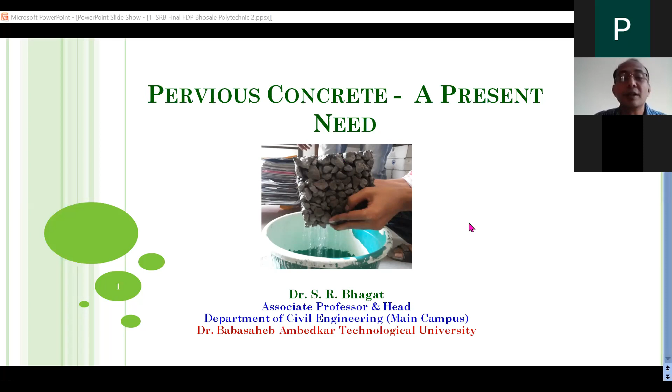I'll cover my presentation with the following points: introduction to the topic, need for pervious concrete and why there is a need, areas of application, materials required, general properties of pervious concrete, and two additional points on environmental benefits and the advantage of using such material in getting carbon points. Finally, I'll conclude the session.

You can see on the screen a photograph showing pervious versus impervious pavement or concrete. In impervious concrete, generally the pavements or areas in big societies are concreted, or pavement blocks are used, or some tile work is done. So whenever rainfall occurs, in general 30% gets evaporated from these concrete surfaces, and 50 to 55% becomes runoff. So percolation is very less.

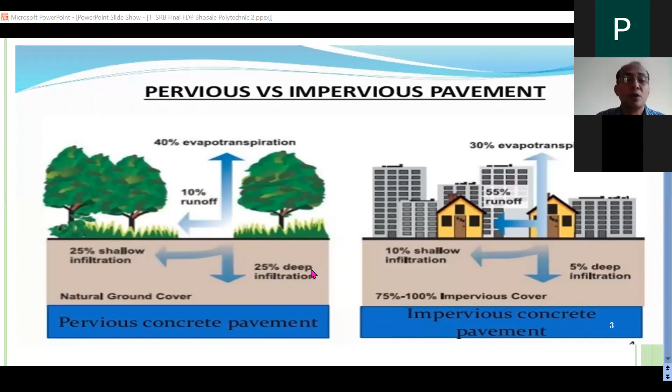Due to this impervious nature of surfaces that we created for our societies, that is now creating a problem. So this presentation is basically based on giving introductory information on this pervious concrete.

So you can see here the concrete. It's used as a pavement also, but for lighter traffic, not for heavy traffic. Water easily seeps, easily permeates through it. So that is how the concrete has to be made.

So what exactly is the meaning of pervious concrete? This pervious concrete, some of us know, is called no-fines concrete. No fines means there is no sand or particle size smaller than 4.75 mm, which we call fine aggregate. It is also known as permeable concrete, porous concrete, or enhanced porosity concrete.

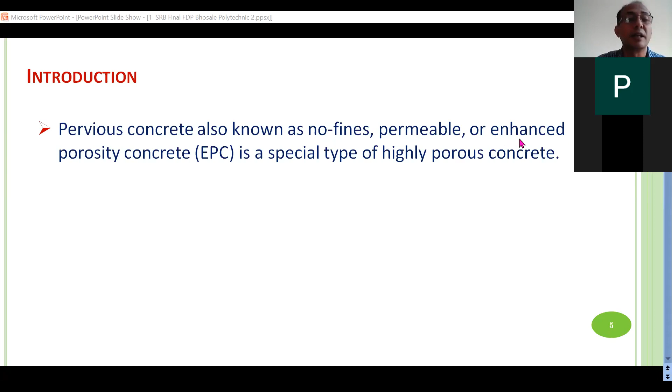In general, the materials used for our ordinary concrete are used here too; only the fine aggregates are not used. However, one may use a small quantity of fine aggregates in making this pervious concrete, depending on proportioning. Coarse aggregate generally is of size 10 to 20 mm, same as ordinary concrete.

Water to cementitious material ratio is important. Cement with fly ash or some additives can be added so that environment-friendly concrete can be prepared. The water to cementitious material ratio is in the range of 0.26 to 0.4. Any admixtures, if required, can be added to modify the properties of the pervious concrete.

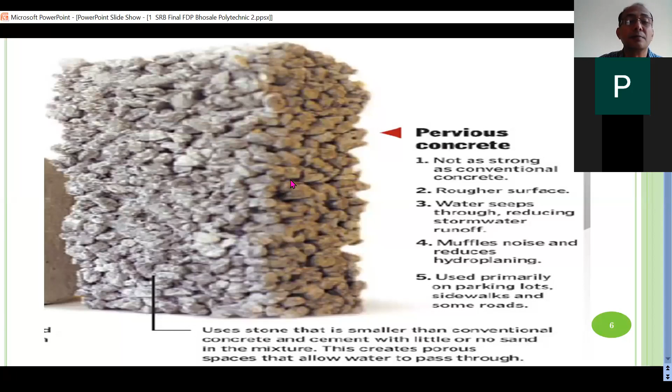Now, why is there a need for pervious concrete? Because if you see over a period of 20 to 30 years, there is large growth in these cities. The small cities are becoming empty now.

The old generation or parents stay in the cities, however, the younger generation moves to major cities for education or job. This migration of the younger population poses a burden on the existing resources of the city, and the requirement for this migrated population is growing day by day.

And the total area is now becoming concrete. Somebody says that now Mumbai, Pune, or such cities, Delhi, Bangalore, these are concrete jungles.

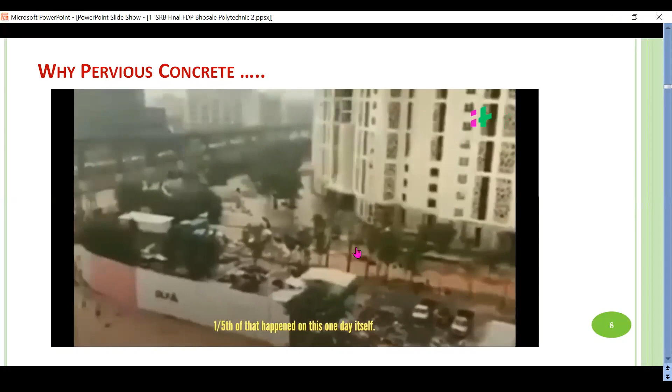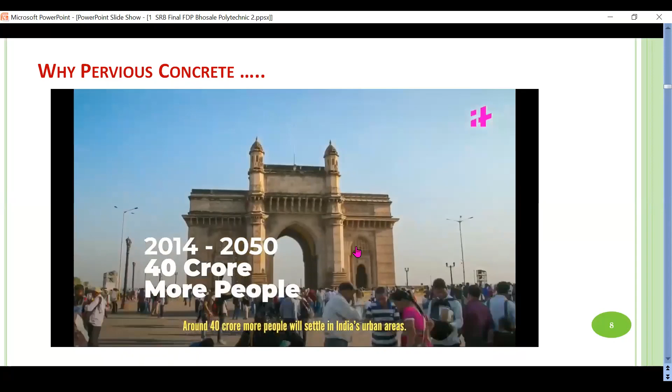China के बाद India has the second largest urban population in the world. UN का estimate है कि 2014 से 2050 के बीच करीब 40 करोड़ लोग इंडिया के urban areas में settle होंगे। Poor job opportunities in the villages and small towns also lead to this migration.

फिर infrastructure और affordable housing की कमी की वजह से large slums have mushroomed in all of these cities. मुंबई की 1.5 करोड़ से ज्यादा की पॉपुलेशन का 54% हिस्सा इस समय स्लम्स में रहता है।

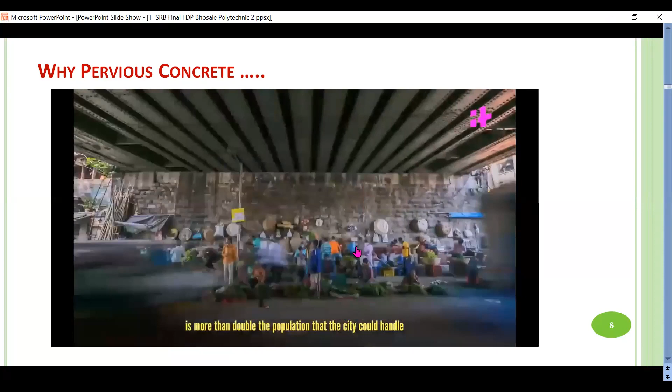NYU की एक रिसर्च के हिसाब से मुंबई is amongst the most populated unplanned cities globally. मुंबई की current population is more than double the population that was decided in 1970s that the city could handle। इतनी पॉपुलेशन की वजह से इन सभी सिटीज की हुई काफी अनप्लान ग्रोथ, जिसने लगाई है इन सिटीज के ड्रेनेज सिस्टम और वेस्ट डिस्पोजल सिस्टम की बाट।

बैंगलोर को ही देख लो, यहाँ एक एफिशिएंट स्टॉर्म वाटर ड्रेनेज सिस्टम हुआ करता था कनेक्टिंग डिफरेंट लेक्स। एक लेक का पानी ओवरफ्लो होता तो इट वुड ऑटोमेटिकली फ्लो टू अनदर लेक थ्रू कनेक्टेड नेटवर्क्स। फिर क्या, एंक्रोचमेंट्स हुई, सॉलिड वेस्ट ने इन चैनल्स को ब्लॉक करना शुरू किया और फ्लड वाटर ओवरफ्लो होने लगा।

एंक्रोचमेंट्स और अनप्लान्ड कंस्ट्रक्शंस की वजह से गुड़गांव की ही तरह बाकी की बड़ी सिटीज में भी नेचुरल वाटर बॉडीज धीरे-धीरे खत्म हो गई हैं।

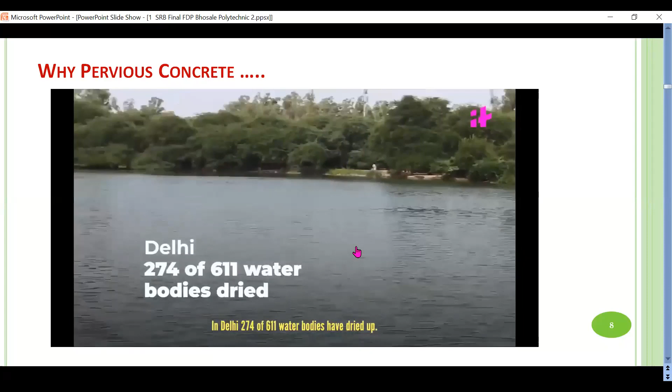हैदराबाद में 375 lakes have gone extinct। दिल्ली में 274 of 611 water bodies have dried up। चेन्नई, आजादी के टाइम पर यहाँ 30,000 से ज्यादा तालाब थे, 5,000 हेक्टेयर मार्शलैंड थे। अब इनमें से मोस्ट ऑफ द पॉन्ड्स डोंट एग्जिस्ट और 5,000 हेक्टेयर के मार्शलैंड 600 हेक्टेयर से भी कम के रह गए हैं। मार्शलैंड्स, वेटलैंड्स, लेक्स, रिवर्स, ये सब नेचुरल रिजर्वॉयर्स का काम करते हैं।

यही नहीं, ये ग्राउंड वाटर को भी रिप्लेनिश करते हैं, जो कि इस समय मोस्टली जगहों पर इज डिप्लीटिंग एट अ वरिंग पेस। वेल, ऐसा नहीं है कि नथिंग इज हैपनिंग अबाउट इट।

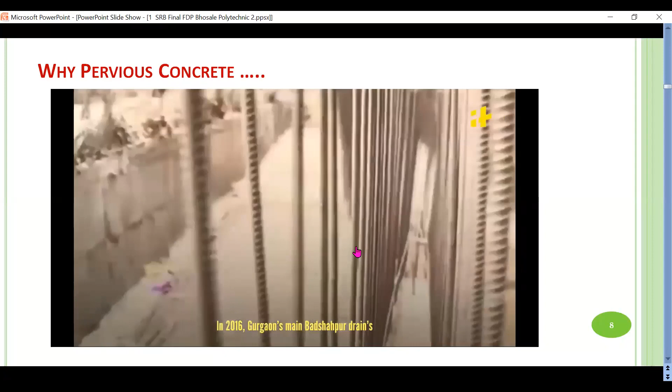2016 में गुड़गांव के मेन बादशाहपुर ड्रेन को एक्सपैंड करने का प्रोजेक्ट अनाउंस हुआ। मोस्ट ऑफ द वर्क ऑन दिस हैज बीन डन, बट कुछ पार्ट अटका हुआ है ड्यू टू लिटिगेशन ओवर स्ट्रक्चर्स दैट नीड टू बी रिमूव्ड।

अरावलीज के चेक डैम्स भी रिवाइव करने का प्लान हो रहा है। बाकी सिटीज में भी हर साल कुछ ना कुछ प्रिपरेशंस होती हैं, लेकिन प्रॉब्लम ये है कि हम बहुत सो के जागते हैं। वी स्टार्ट प्लानिंग लेट एंड देन इम्प्लीमेंटेशन में और भी ज्यादा टाइम लगाते हैं। जब तक इम्प्लीमेंट होता है, नई प्रॉब्लम्स खड़ी हो जाती हैं।

वी डोंट फोरसी द फ्यूचर, like in case of what happened in Gurgaon के underpasses अभी। We all know climate change is happening, so extreme weather के लिए शायद already prepared हो सकते थे। इसके लिए किसी भी urban infrastructure project से पहले detailed studies करना बहुत important है कि extreme weather conditions को कैसे tackle किया जाएगा। But ऐसा rarely ही होता है।

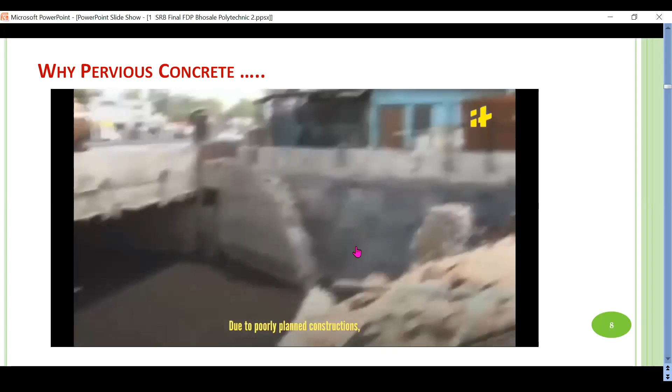Due to poorly planned constructions, already हर साल इतना कुछ होता है। Constructions में जो गलतियां हो चुकी हैं, उसे तो नहीं ही चेंज कर सकते। But authorities need to come up with innovative solutions so that जो हालत है, उसके हिसाब से सुधार हो सके। And that has to be done on an urgent basis।

ज़्यादा से ज़्यादा पानी goes into the groundwater and doesn't flow on the land surface। उसके लिए एक effective solution है कि we citizens install rainwater harvesting systems in our homes and buildings। पानी की वैसे ही इतनी कमी है। आने वाले सालों में हाल काफी बुरा होने वाला है।

And we end up wasting all the rainwater, letting it flood our cities। Instead, it should be used to recharge our groundwater। Rainwater harvesting has to be implemented all over, and people need to be made aware।

प्रॉपर अर्बन प्लानिंग की बहुत ज्यादा जरूरत है हमारी सिटीज को। अदरवाइज ये सब डेवलपमेंट जो सरफेस लेवल पर दिखती है, मॉल्स, फैंसी ऑफिसेज, सोसाइटीज, अंडरपासेस, वो सब धरी की धरी रह जाएगी। Real development has to be sustainable, and as we can all witness, there can be no two ways about it।

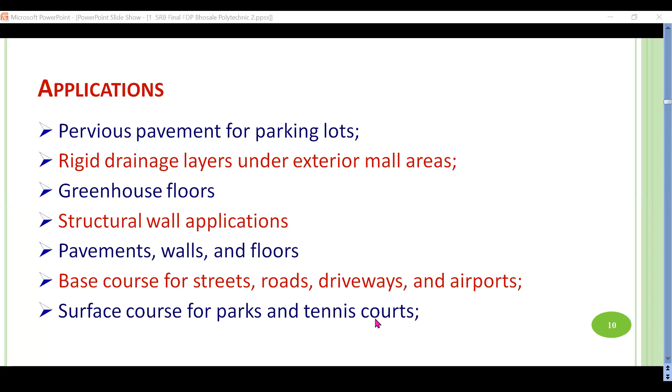Floors for zoo areas and animal barns and stalls. These are some of the applications. Bridge embankments, swimming pool decks. So water when splashed out, that can be collected with the help of this pervious flooring.

Beach structures and sea walls, sewage treatment plants, sludge beds, solar energy storage systems, wall linings for drilled water wells. So generally what happens when we do lining to a water well, the natural springs sometimes get blocked. Lining is required, otherwise the surrounding soil will collapse inside the well.

So wall lining with the help of this pervious concrete can maintain the natural springs in that well, and more water can be fetched through this well. So that is one of the advantages. And artificial reefs, where microorganisms and such types of growth will take place inside the sea. So these are some of the examples. Any other innovative things can be prepared or produced with the help of this pervious concrete.

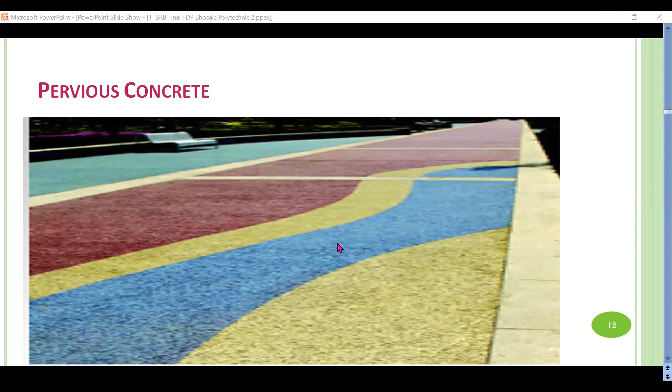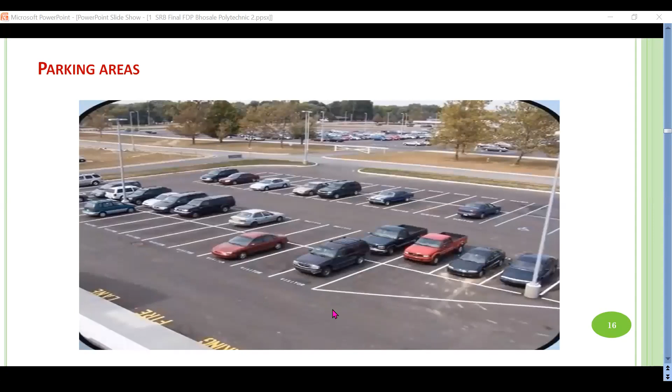Parking areas where this pervious concrete can be used, because there is no point in using this large area, making it impervious and just adding the storm water to the drains. Rather it can percolate through the ground. So inside a garden or pedestrian walkway it can be used.

Greenhouse flooring can be constructed with the help of pervious concrete. Okay, light traffic, there in those areas this pervious concrete can be used, because a wide variety of strength can be achieved by proper proportioning, up to say 20 or 30 MPa, starting from 2 to 5 MPa. So depending on the requirement of strength, pervious concrete can be prepared.

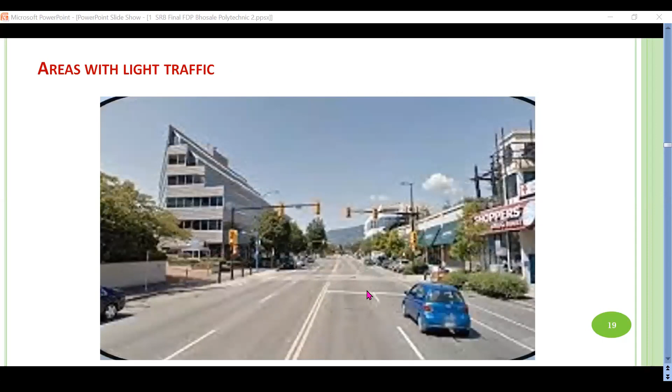Now materials required: it's ordinary concrete, the material that we use for our ordinary concrete, same materials are used except the finer particle, that is fine aggregate. Why fine aggregate is not to be used is because these fine aggregates will block the void, they will make the pervious concrete impervious. So for that reason, smaller particles should not be used. That is how the recommendations are.

However, in small proportion, to modify the properties of pervious concrete, a small quantity of the smaller size particles can be used. Water cementitious ratio 0.25 to 0.4, because a larger quantity of water will improve the workability, but it will make the concrete dense, and the voids that we want from this pervious concrete, connecting voids, won't be achieved because of more compacted concrete.

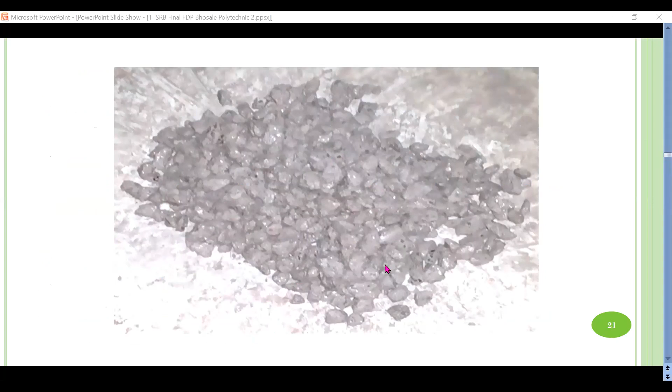So in laboratory at my place also some work has been carried out on this. You can see this a harsh type of mix. It looks like a harsh type of mix. No smaller particles are used in it.

The voids will differ, but the interconnected void should be maintained so that water will percolate through it. That is what the main aim or the main idea behind making a proper proportioning of pervious concrete.

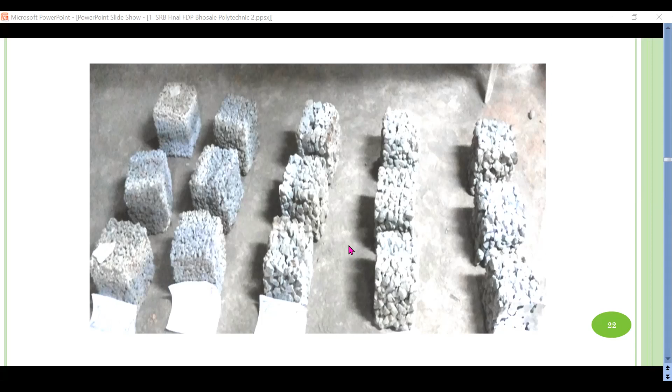So void should be there, but they should be interconnected. So if larger void content is there, naturally more connecting voids are there and percolation will be more. So that is what is an observation.

So minimum voids, why this is required? Because when we go for a mix design, we have to take care of how much voids we want in concrete. It depends on what is the percolation rate we want to achieve from that concrete. So at the time of design, we have to consider that we want, for example, 30% void or 25% void or 35% void. So this will help in mix design of pervious concrete.

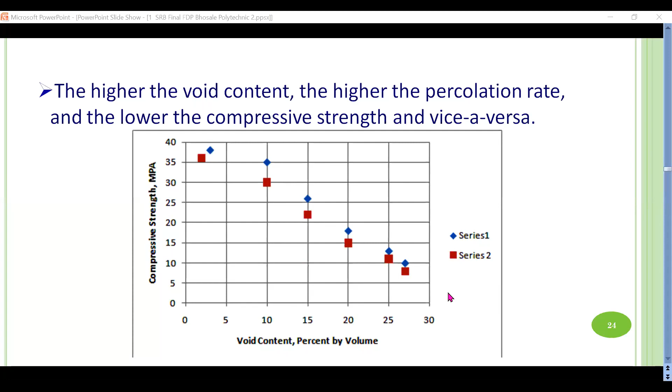So one thing I would like to mention here, that there is no Indian code which gives guidelines for preparing a pervious concrete. So it is the experience, trial and error method, or some international standards we can refer to design a pervious concrete mix.

So quantity of this coarse aggregate, the another parameter that affects the performance of pervious concrete is the paste volume. How much paste volume is there? What is the quantity of cement? And what is the water content or water added while making the pervious concrete?

So naturally what happens, higher paste content means a finer material is more available in more quantity, and naturally whenever we do compaction or vibration, it becomes easy to compact the material, and hence the void content decreases. So the purpose of getting voids will not be served if we use a higher quantity of paste.

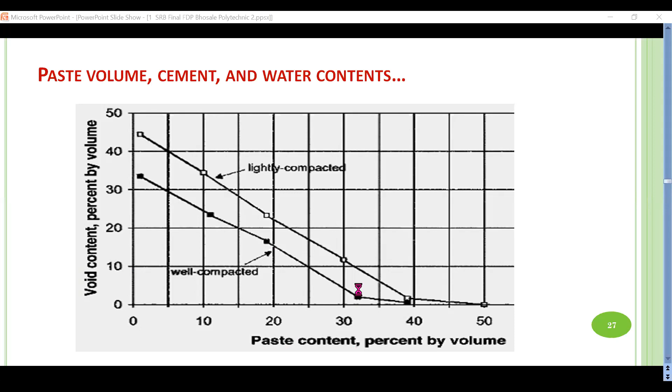So again, a pervious concrete construction, a simple small video is there, 2-3 minutes, which will break the monotony of my plain voice. So if it is not visible, you just let me know, sir.

The concrete truck has arrived at Allison Johnston's home in Menlo Park, California. Today, she's renovating her driveway. An interior designer, Johnston thought a lot about the materials she might use, but she also had some concerns.

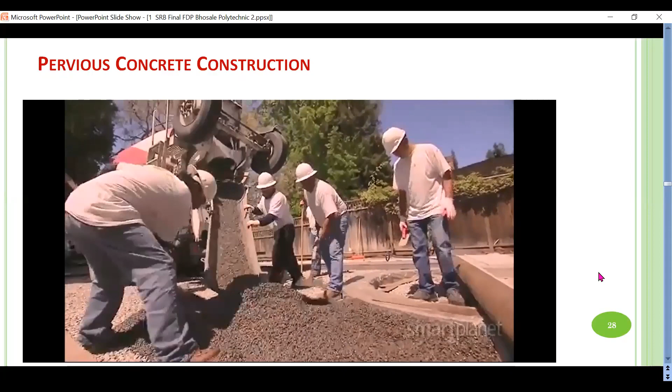Environmentally, we definitely had some drainage problems with our yard, and in Menlo Park, we're required to keep all of the water on our property and not overload the storm drain systems.

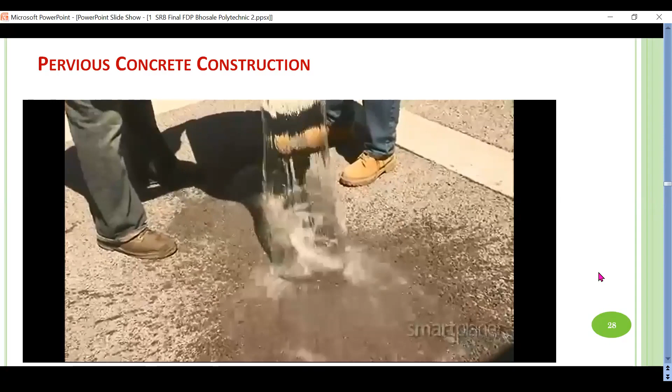So Johnston turned to a smart substance called pervious concrete. While it may look like ordinary paving material, watch what happens when a barrel full of water is poured on it. And it doesn't just drain, it filters out pollutants too.

David Ligori is the contractor helping Johnston with the installation. So as the water goes through the pervious concrete, a lot of bigger particles, heavy metals, things like that get caught up in here and don't pass through.

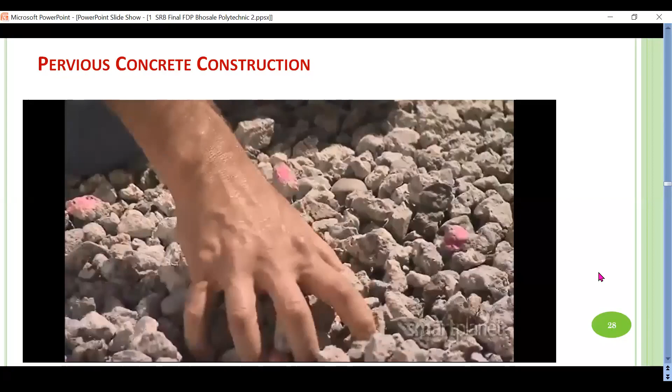Under the concrete, Ligori laid down a bed of crushed rock. The bed acts as a reservoir for the water until it can soak into the soil. And while the water's sitting there, the microbes have time to digest the various chemicals that are in the water. They literally eat the pollutants and make them harmless.

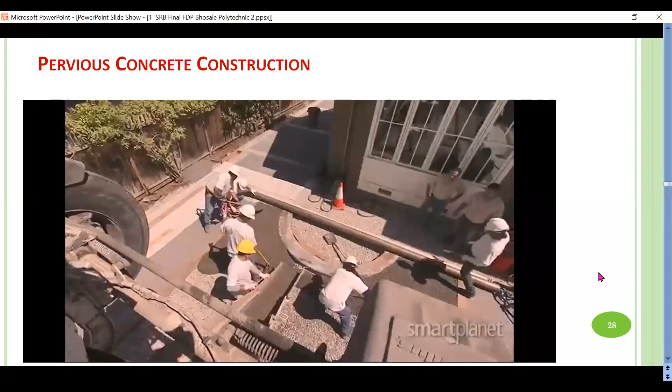While the new driveway costs about 10% more than a traditional concrete driveway, Johnston says she will save money in the long run. This allowed us to drain some of that water straight through the driveway rather than running an extensive drain system. For Smart Planet, I'm Sumi Das.

So the video has clearly mentioned that pollutants can be trapped in this porous concrete, thereby reducing the load on the purification plant of municipal bodies. So that is another advantage of this pervious concrete.

Now I'll come to what are the properties of this pervious concrete. The various properties of pervious concrete depend on its porosity, that is void content, which in turn depends on cementitious content, paste content, water to cementitious material ratio, and compaction level. For our ordinary concrete, we want a very compact, dense material.

And for that, we go for vibration, maybe pin vibration, table vibration. Here, the compaction level should be very less, just to adjust the coarse aggregate particles without blocking the voids inside it. So a little vibration is required so that the desired strength can be achieved.

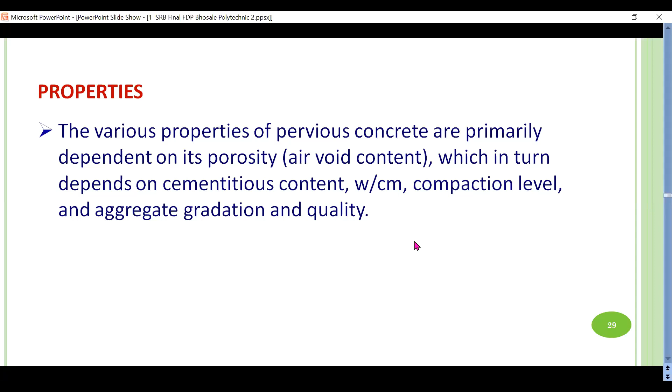So compressive strength versus unit weight, that is already we know for our ordinary concrete, when it is properly compacted or fully compacted, we take it around 2400 to 2500 kg per meter cube.

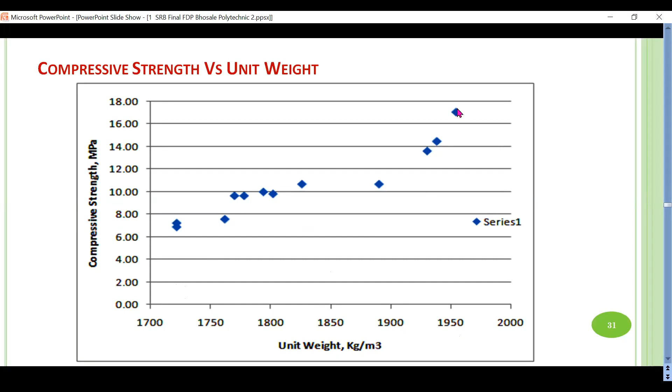Here also the compressive strength and unit weight: as unit weight increases, it means more compacted concrete, and the compressive strength will also increase. So the behavior is similar to our ordinary concrete.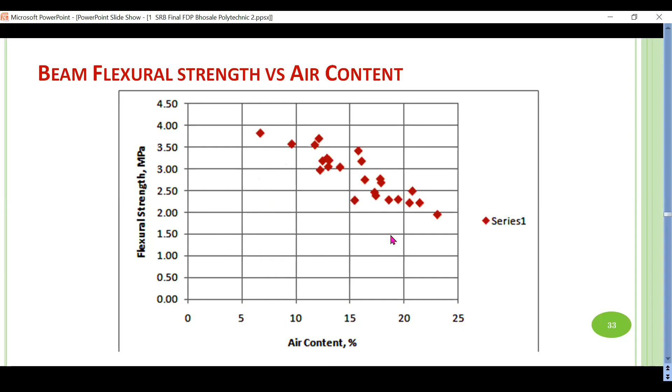The other graph shows the beam flexural strength versus air content. So flexural strength decreases again with air content. Such information will be useful. Let us say we want to use it for a driveway or light traffic, then we are interested in the flexural strength. At that time we need to refer to such information to go for a proper design.

Void content versus density: void is more, density reduces, that we know.

So void content depends on aggregate gradation. Generally, for our ordinary concrete, we have all sizes of particles ranging from 10 mm to 20 mm, whereas for pervious concrete it is recommended that a single size particle should be used so that interconnected voids will remain.

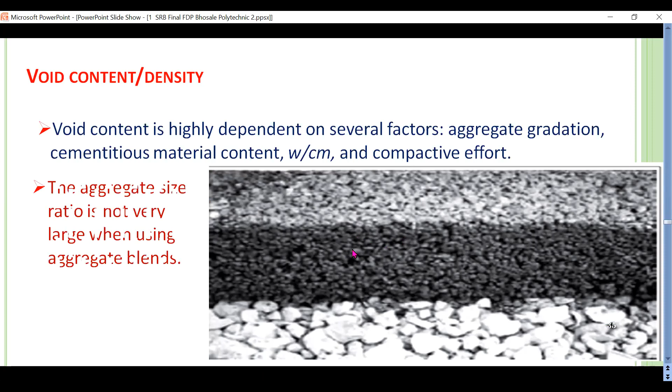So this is the influence of aggregate size and gradation on the porosity of pervious concrete. If you go on increasing the percentage of a smaller size particle, as I told you, it depends on the requirement. The finer aggregate can be added in a very small quantity.

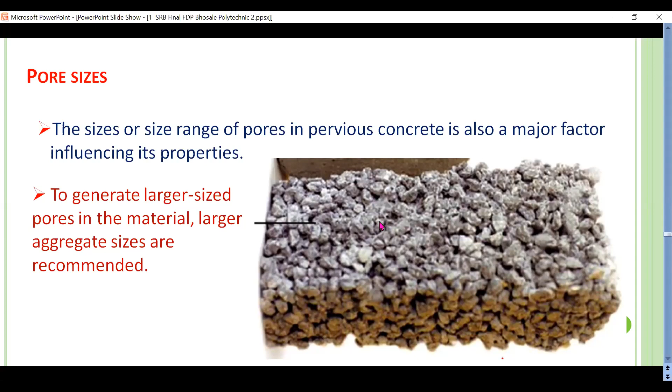Now, what are the pore sizes present in it? The pore size depends on the size of aggregate that we use. If we use a smaller size aggregate, let us say 10 mm size, and if the voids are interconnected and the porosity remains the same, the permeability or percolation of water will be similar to concrete prepared with 20 mm size aggregate. That is the observation from the experiment conducted in my department.

You can see here a microstructure of three different size aggregates: one is 2.36 mm, another is our fine aggregate 4.75, and the third one is 10 mm aggregate size. These dark areas, these black spots, are voids. If we quantify all these voids, it is found that for each sample it is around 20 to 25%. So the void content is the same, but the pore size is different.

If you see for 2.36 mm, the pore size is different. For 4.75 mm, it's larger than what we have for 2.36 mm. And for 10 mm coarse aggregate, the pore size is still larger than 4.75 mm. However, the total voids present in each area is around 20 to 25%. And the percolation rate for all three specimens is equal.

What do we mean by this? Even if we go for different particle sizes for preparing pervious concrete, if the voids are interconnected and sufficient voids are present, the percolation is not going to be affected. It will remain almost the same. That is the experience from different sizes of coarse aggregates.

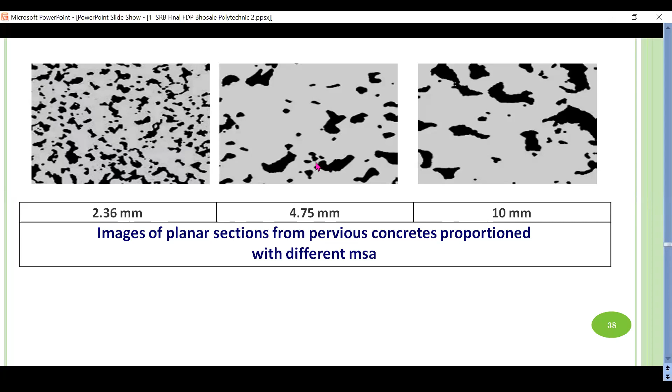A permeability of 36 liters per meter square per second is found to be more satisfactory. The infiltration rate of pervious concrete will fall into the range of 80 liters per minute per square meter to 720 liters per minute per square meter.

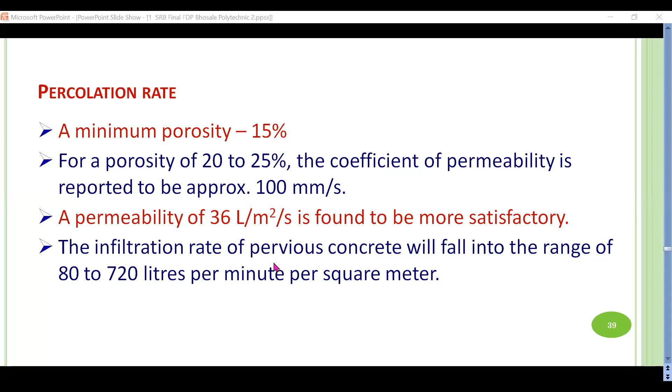You can see here a fire hydrant is open with full discharge, and the entire water is absorbed by the pervious concrete.

Air content and percolation: as I told you, around 15% it is ineffective. After that, the percolation will be very high. Can you see these values? Yes, sir. 500, 1000, 1500.

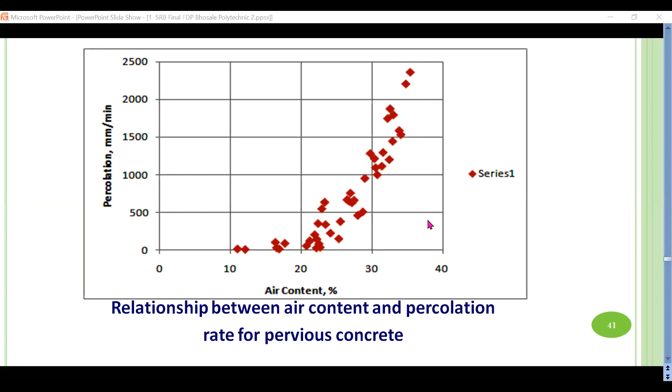If you come to this Konkan region, my place, the average rainfall is around 3000 mm. So even with that rainfall, when it heavily rains, this pervious concrete can absorb or allow this water to percolate through it. So I don't think there is any issue with this. You can see this percolation test being performed.

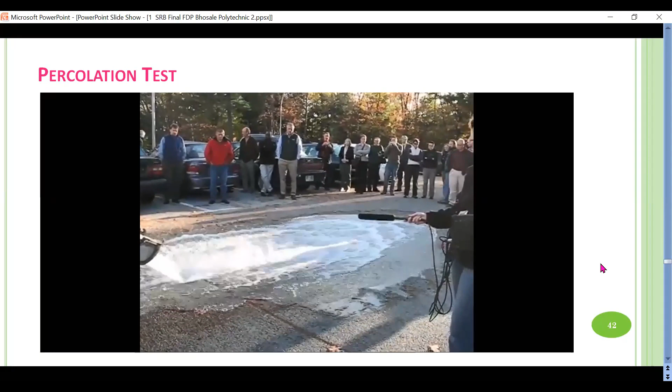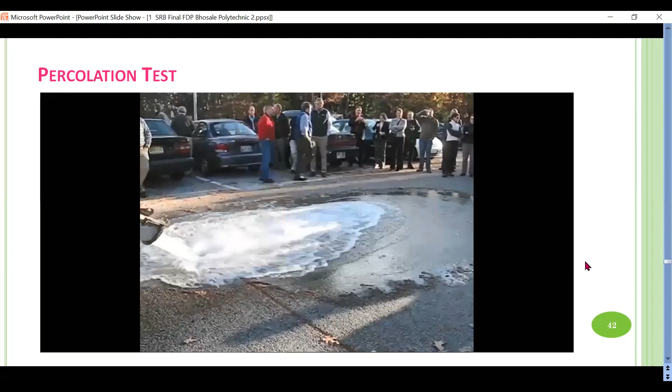So nowhere in the world will such a type of rainfall occur, I think, except during a cloud burst. So the entire water can be absorbed or percolated through this pervious concrete layer. Fine, so that was a field test, you can say.

This is how a standard test proposed by ASTM for checking the permeability or percolation rate of pervious concrete works. A sample is placed here. This is the water level. It is just similar to what we have in the permeability test of soil, the falling head permeability meter. It is similar to it, but of a larger size.

So that was all about pervious concrete, its applications, the materials, and properties of it. I'll come to the last two parts of my presentation, that is environmental benefit. So everyone is talking about sustainability. Even UNDP has 17 such criteria of sustainability, and stormwater management is one of them. So what are the environmental benefits of this pervious concrete?

So the first benefit is stormwater management. What happens if impervious surfaces are there? The rainwater flows over this impervious surface and goes inside the drains.

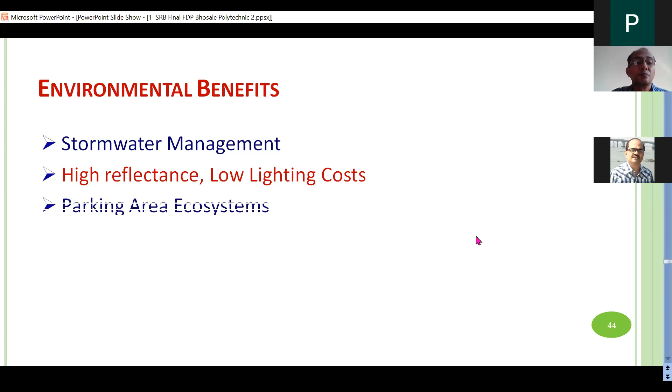So parking area ecosystems is one of the environmental benefits of it.

And the heat island effect: because of impervious surfaces or concreting in the city, that area has a higher temperature compared to the surrounding land. If you go outside the city, you will find the climate or temperature is a little lower compared to the city area. So pervious concrete will reduce this temperature rise in major cities or urban areas. That is one of the advantages.

For stormwater management, as already told, rainfall should get absorbed, so the load on the filtration unit will be less.

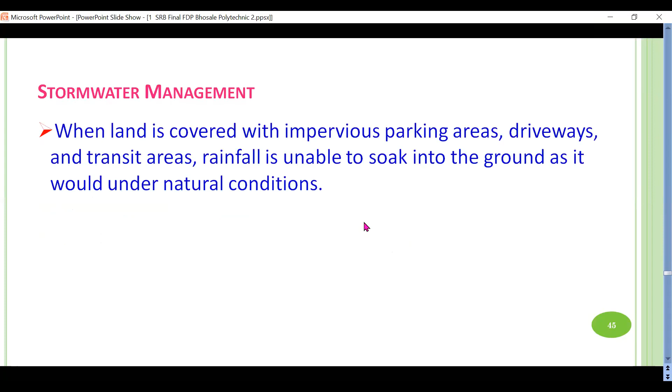The permeability of porous concrete provides a potential solution to the problem of stormwater runoff, which is a serious environmental concern accompanying increased urbanization. Even pollutants can be reduced, thereby reducing load on treatment.

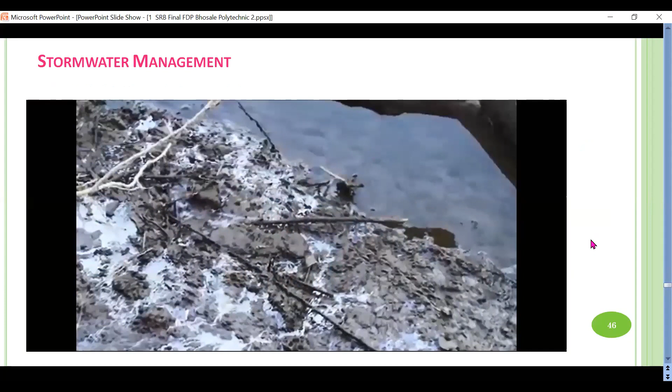Stormwater runoff occurs when rain falls in urban areas. This runoff can cause increased pollution in rivers and streams, flash floods, and loss of rainwater that replenishes the water table and aquifers. By capturing rainwater and allowing it to seep into the ground, pervious concrete is instrumental in recharging groundwater and reducing stormwater runoff.

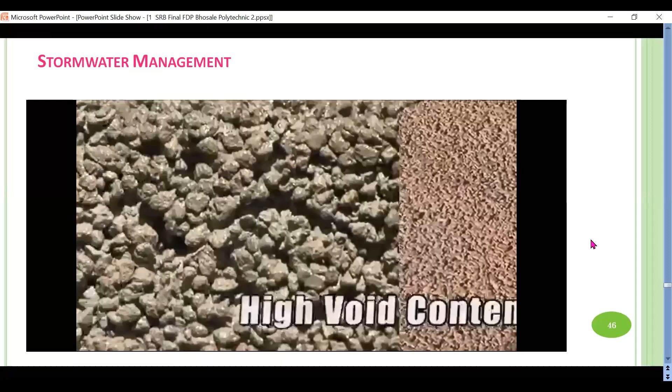Pervious concrete is a carefully controlled mixture of mainly coarse aggregate, cementing materials, and water. The reduced sand content results in a pavement with a high void content, allowing water to pass freely through it, putting rainwater back where it belongs, in the ground. Pervious concrete has a 15 to 25% void structure, and flow rates of 200 liters of water per minute for each square meter of pervious pavement are typical.

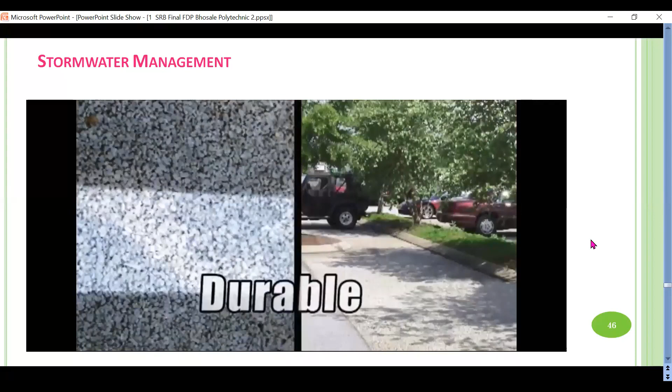Pervious concrete is a durable material. It has been used for low-volume streets, driveways, sidewalks, and parking lots throughout the Pacific Northwest. It has also been used in freeze-thaw conditions for over 15 years, and technical and design expertise is available to ensure optimal performance in freeze-thaw applications.

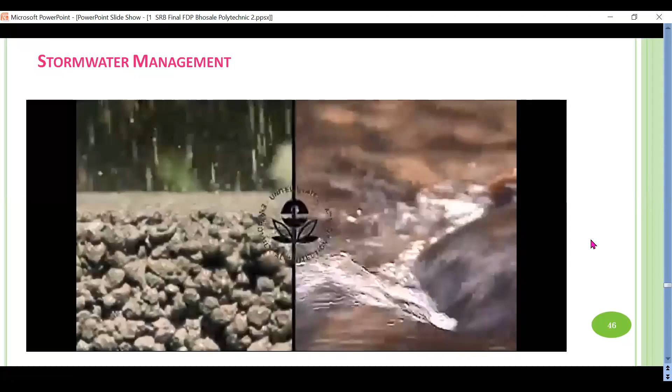Pervious pavement is a best management practice recommended by the U.S. Environmental Protection Agency for the management of stormwater runoff. In traditional parking lots, stormwater can send up to 90% of pollutants, such as oil and other hydrocarbon liquids, directly into rivers and streams, affecting marine habitats. By allowing water to pass through pervious concrete parking lots into the ground, soil chemistry and biology can treat the polluted water naturally. Pervious concrete is the smart business choice.

This pavement technology also creates more efficient land use by eliminating the need for retention ponds, swales, and other stormwater management devices. In doing so, pervious concrete allows for more efficient land development and has the ability to lower overall project costs on a first cost basis.

It's surprising to people just how much water can pass through in such a short period of time, and when you see it firsthand, you're sold. We were looking for something that would cut down on our need for a stormwater system.

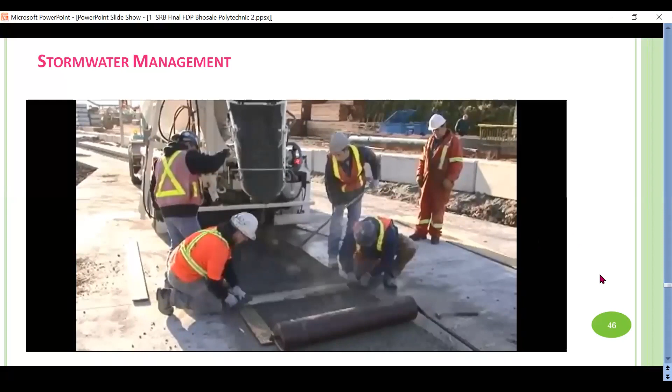Basically, we've got really open graded sub base here, about 13 inches. We didn't have to put in any stormwater system to handle the water over the ground. This system basically collects all the water off these roadways, puts it through this pervious concrete, and then into the ground. So it saves us some money.

If you have a site that needs detention, the first choice is typically a tank of some sort, which tends to cost $50,000 to $100,000 to put in. Even if there's a premium of 10% or so for it being pervious, you're probably still going to be cheaper than putting a tank in. And you get the benefit of the fact that the parking lot area is not impervious.

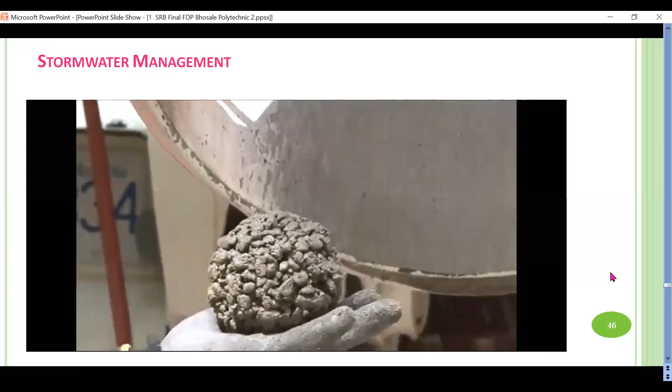Pervious concrete has tremendous potential for our industry, for our contractors, for our ready-mix producers, to supply a product that can contribute to environmental sustainability. In Surrey, one of our issues is the fact that we have flooding in the lowlands. The more we develop in the uplands, the more impact there is downstream.

In order to avoid flooding downstream, we need to soak the water back into the ground as much as possible, or reuse it, evaporate it, do something with it so that it's not going into the storm system and ending up down at the bottom end of the drainage system.

We're doing some porous concrete parking lots, big ones. The reaction from our administration is great because they now have something that shows we are really trying to be more sustainable. From a cost perspective, on the first project, I don't think it came out much more expensive than a conventional asphalt parking lot. But once our concrete suppliers and contractors become familiar with it, they find it as easy to use, if not easier, than conventional concrete.

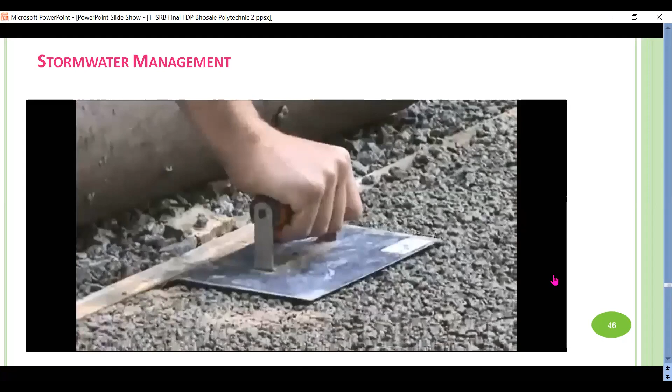Start to finish, this product is much easier than traditional concrete. You place it, you do a few things to it in a sense of finishing, and it's done and covered. So time-wise, we're done in an hour, what a job traditionally would take 2.5, 3 hours.

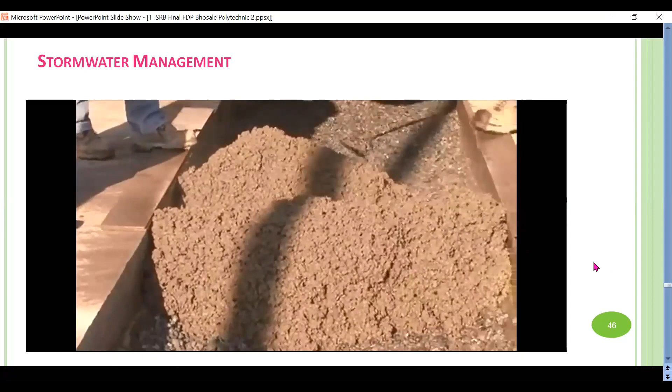This pervious concrete has been placed on a compacted surface. The concrete is shot directly out of the truck, a standard ready-mix truck. This concrete's batched out of a dry plant, and we've made no modifications to the process. It's raked into place, screeded off approximately a half inch higher than the finished surface. It's then rolled with a roller to level the surface out, provide compaction, and give us a smoother texture. The concrete is then quickly covered with some poly cover to retain any moisture in the concrete.

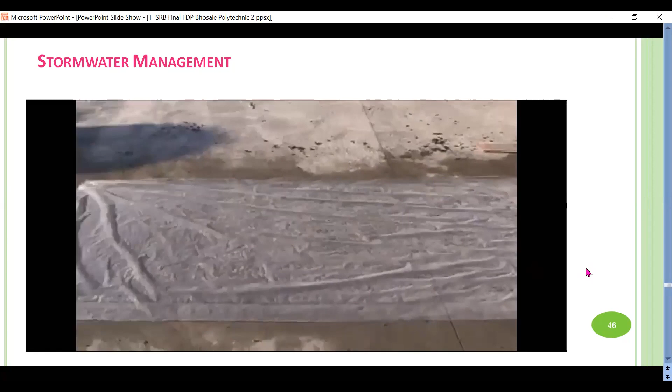So that was self-explanatory with the advantages of pervious concrete. The other environmental benefit is high reflectance, low lighting cost. As I told you, as good as 30% of lighting cost can be reduced with the help of such reflecting surfaces.

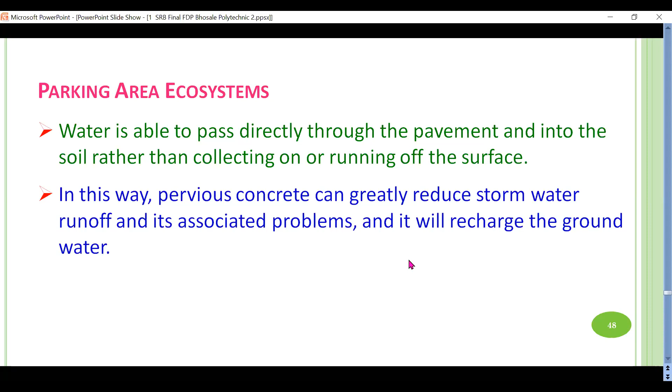Parking area ecosystems: water can pass easily through this parking area pavement into the soil rather than collecting into the stormwater drains. So this way the stormwater runoff reduces, and the problems associated with it, that is pollutants and other things, also reduce down. Those pollutants won't go into the river or lake from where we collect water for drinking or for other purposes.

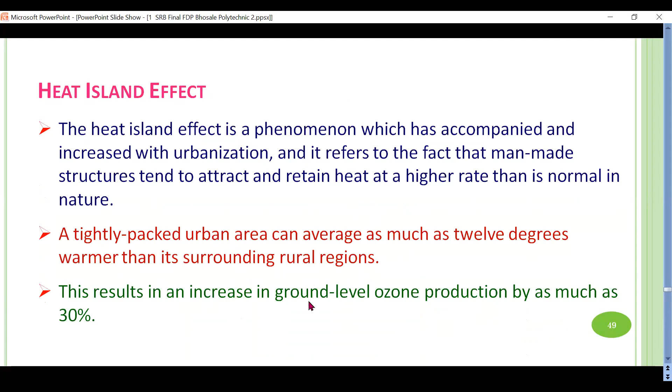As I told you, heat island effect - naturally the temperature of the city will come down by 2 to 3 degrees compared to impervious surfaces. At the same time, ozone production can be reduced with this.

The other advantage of this pervious concrete is LEED points. LEED is nothing but Leadership in Energy and Environmental Design, a rating system developed by the United States Green Building Council to evaluate the environmental performance of a building. That is what this LEED rating is, generally carried out with various points for a building.

What UNESCO predicts is that many countries will find a shortage of physical water in the coming 10 to 20 years. By 2050, most of the major cities in the world will dry out, and they need to take care today itself so that the next generation will have water for use. Otherwise, you can see that one city in Southern Africa has zero water now, zero rainfall. So to avoid such a situation, this pervious concrete will help.

So what are the different LEED points that one can gain from this pervious pavement: LEED credit SSC 6.1, stormwater design quantity control - that credit can be earned by using this pervious concrete in societies or in open areas. LEED credit SSC 6.2, stormwater design quality control - on this also the LEED credit can be earned.

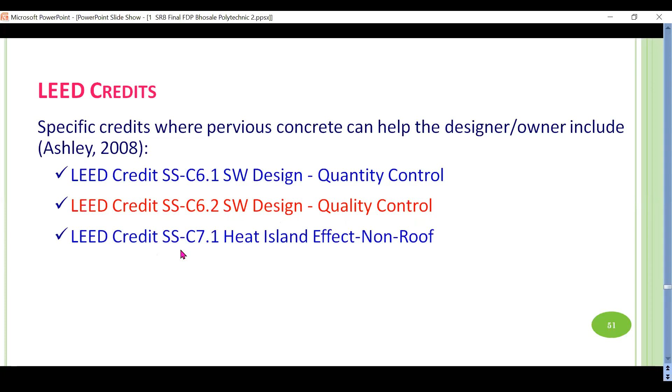LEED credit SSC 7.1, heat island effect non-roof type, that can be earned. Similarly, LEED credit WEC 1.1, water efficient landscaping, that can be earned. LEED credit MRC 4.1 and MRC 4.2 for recycled content - recycled aggregate can be used for making this pervious concrete. And finally, LEED credit MRC 5.1 and MRC 5.2 for using regional materials, because recycled content can be used.

So these are 6 credit points that can be earned if a pervious concrete is used.

Now, one or two slides are there. Pervious concrete is basically a low carbon footprint concrete. The environmental effect of this carbon dioxide, everyone knows - the global warming effect is there, the glaciers are melting, the average temperature is rising. So everyone is concerned about Mother Earth, and everybody is looking for a sustainable solution or a sustainable material. So we have to reduce down our carbon footprint.